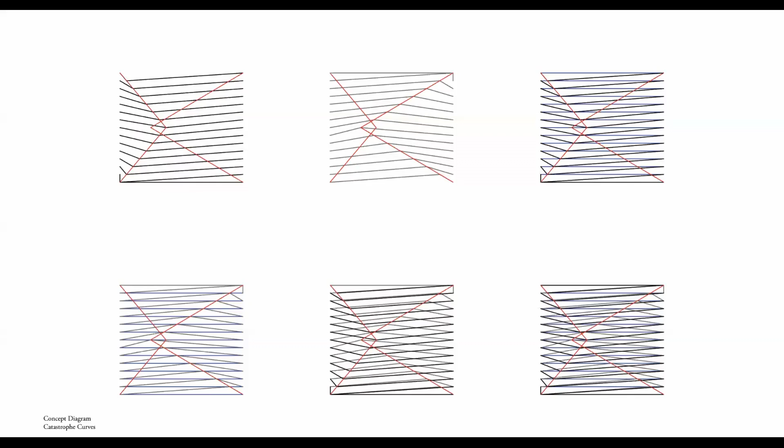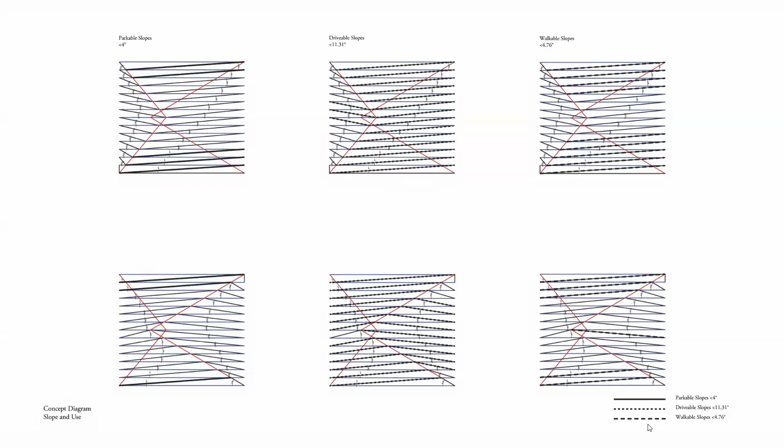People move through space with different cadences, creating different patterns with different intentions. What dictates these flows? This project examines how surface gives rise to movement and how a surface is informed and reinformed by movement and use.

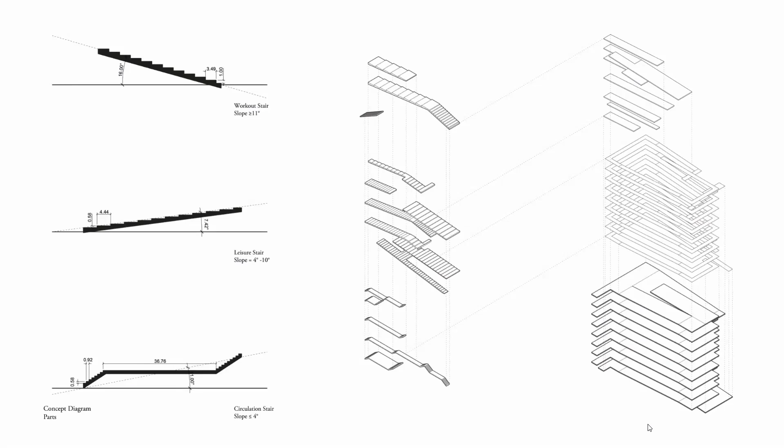A control curve informs the slab, which informs slopes and ramps of various inclines, giving rise to various types of stairs. The stair then informs human flows and activities. The original control curve is not static. It evolves as it yields and adapts to the program.

Changes in inclines give rise to program. Change in incline indicates a change in state or change in program. Slope and program resist each other and inform each other. The section is a consequence of slope and program.

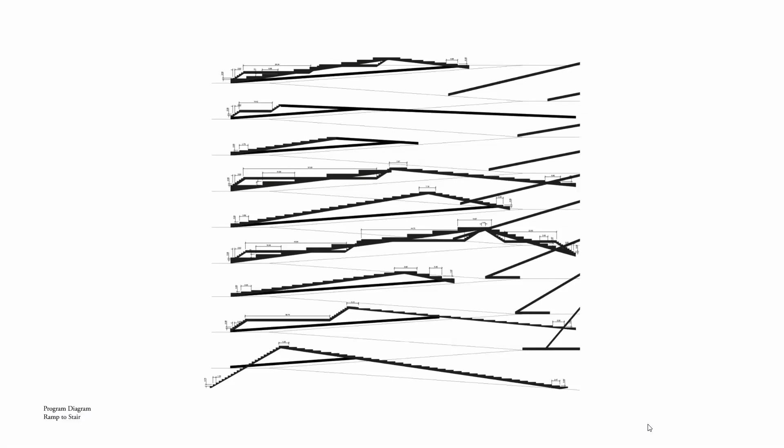This project examines how tectonic surfaces push back on the human body and influence behavior and movement through space. This gym does not contain standard exercise machines. Instead, it contains a series of surfaces conducive to various activities at various levels of exertion, applying different resistances on the human body. Sloped surfaces interfere with human movement through space.

The project is located on an infill site in downtown Los Angeles, and the proposed building reacts to those on either side of it. The section, through slope and stair, communicates program and activity within the building. Through variation in slope, the section reveals levels of resistance and exertion.

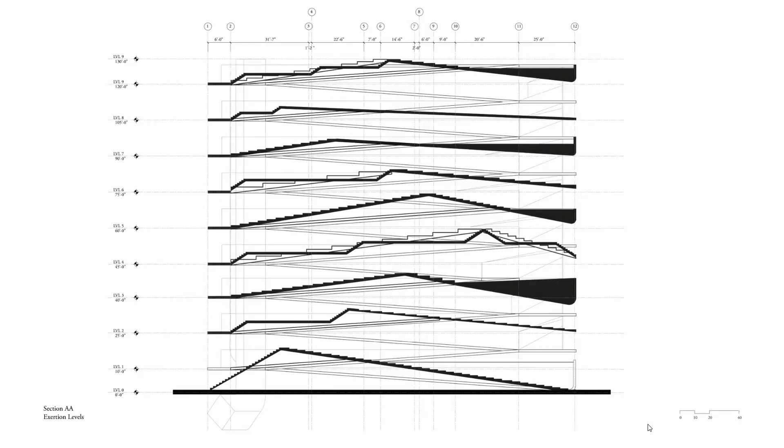The transverse sections, unlike the long sections, reveal primarily linear circulation across the slab from one program to another. Slab slopes and curvatures are tuned to the different cadences of vehicular and pedestrian circulation through space.

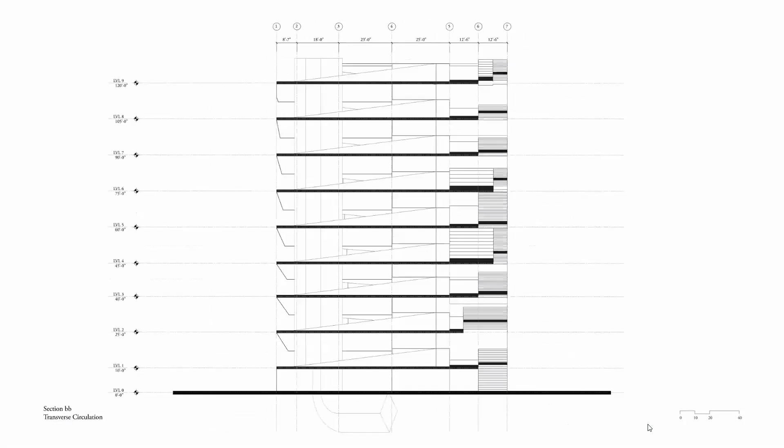The elevation responds to internal conditions by indexing thresholds, concealing some programs while exposing others. The elevation operates at two scales: the horizontal, fine grain, highly calibrated, acting locally, and the vertical, coarse grain, acting globally.

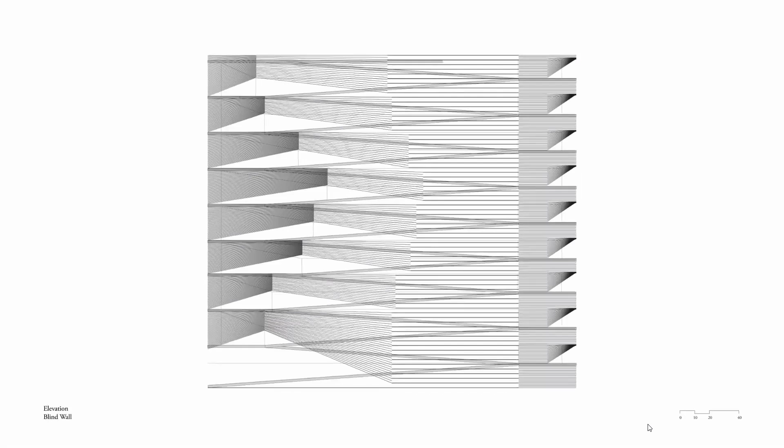While the transverse and long sections translate program and activity differently, the elevations remain contiguous around the building, tracking state and behavior changes within. Cables diverge, converge, and bunch in response to internal programmatic conditions in order to create transparency, translucency, and opacity.

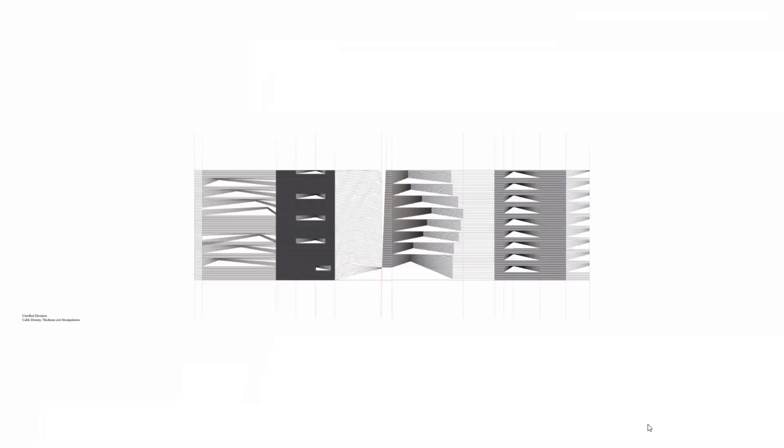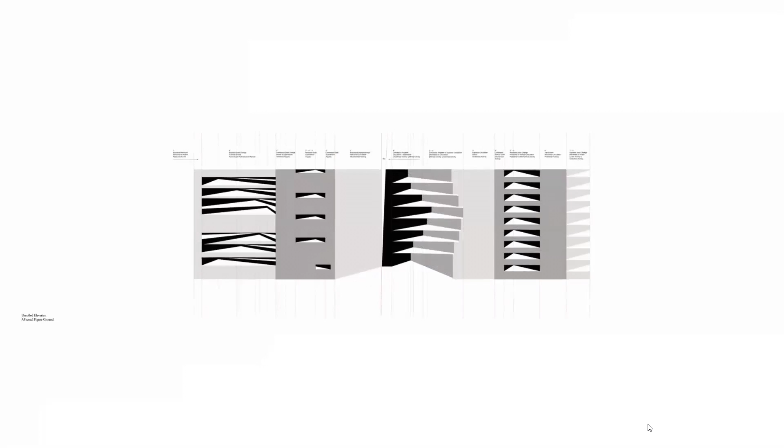Exploring further the potential of a cable screen system, the elevation alters cable dimensions in response to programmatic shifts. The figure ground indicates sections of the facade which are opaque, transparent, and translucent.

Thresholds are defined by a change from horizontal surface to inclined surface, by a change in degree of incline, and by a change in stair type. Thresholds indicate a change in state or a change in behavior and are defined by surface tectonics.

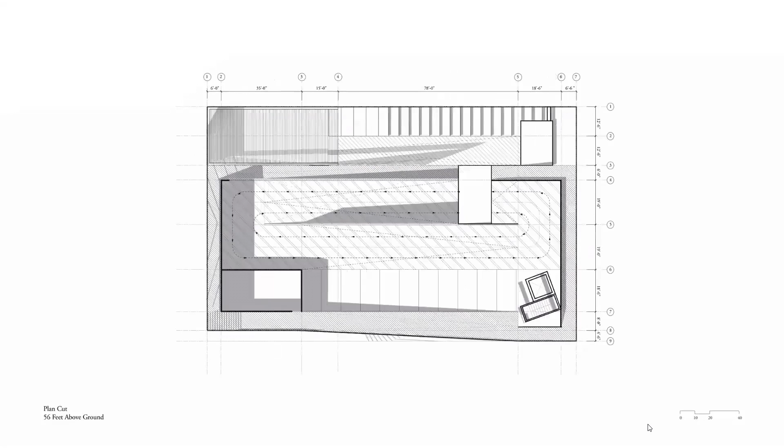Shadows in plan from the elevation screen produce effects that correspond to programmatic states. These shadows both react to interior program and influence it.

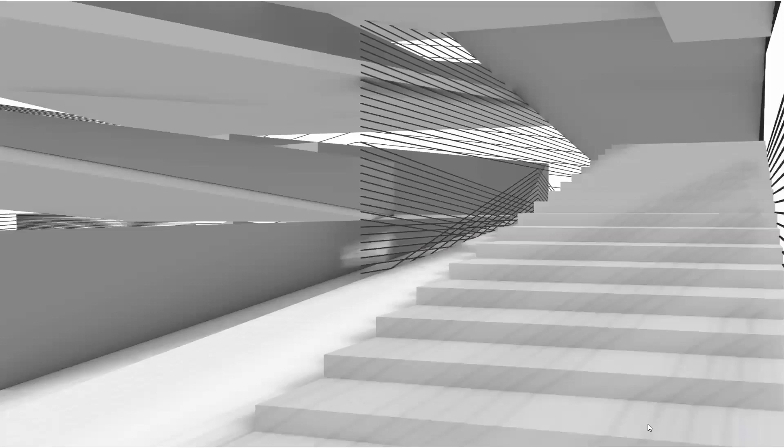Architecture is often faced with the task of bringing together two often diametrically opposed entities. Combining a gym with a parking garage seemed one such pairing. This project examines the subliminal interferences caused by sloping surfaces in the production of behavior suited for both programmatic conditions. These interferences manifest as resistance on the human body.